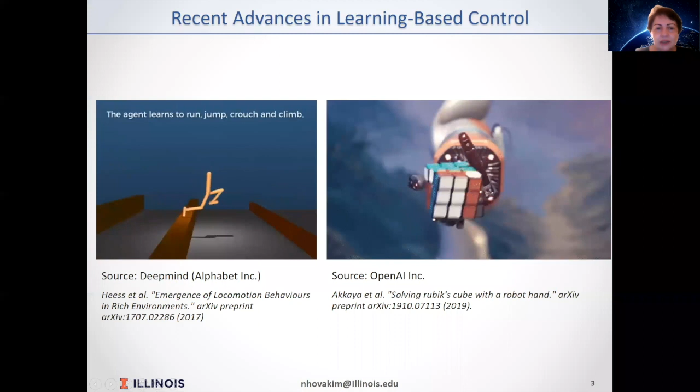To get started, I have here two animations that have got lots of attention on the media. Here you see an AI type of controller or learning-based controller, where, for example, on the left screen, the robot collects the data after every fall, uses the data to learn and goes forward. This video has accrued more than 10 million views on the internet.

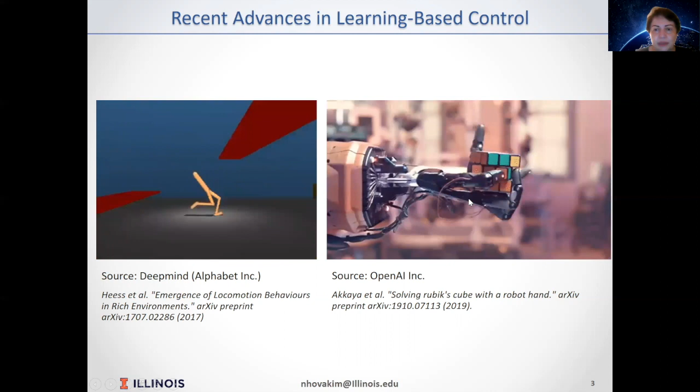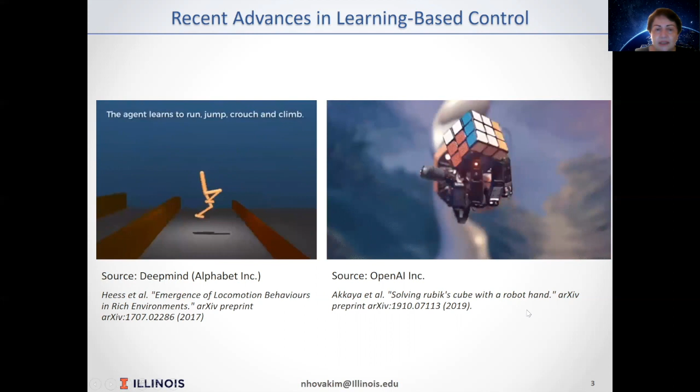And here is the Rubik's Cube that most likely many of you have played with. Again based on trial and error. It tries to assemble the Rubik's Cube, and there have been great success stories with it as well. Having these types of success stories, the learning-based control methods coming from computer science got lots of attention.

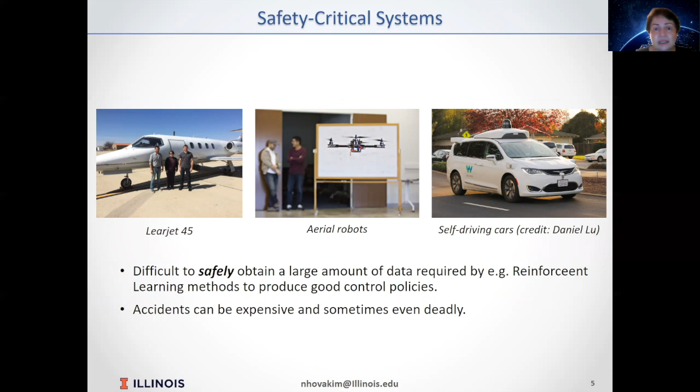However, as we work with safety critical systems, such type of approaches are not acceptable. One of the reasons is that when you are in an airplane or in a self-driving car, a crash can be catastrophic and cost you human lives. So what should we do so that we benefit from the availability of data, cheap sensors, cheap computation on today's platforms, and at the same time, never compromise the system safety?

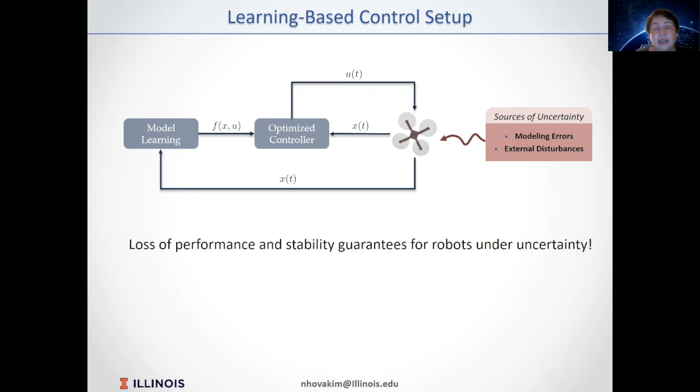In such systems, loss of performance and stability guarantees are quite possible when you have uncertainties that have not been accounted for in your modeling. You cannot train your model for all possible scenarios, right? Because accidents like loss of control efficiency or turbulence gusts can never be predicted well enough to have a trained controller for those environments.

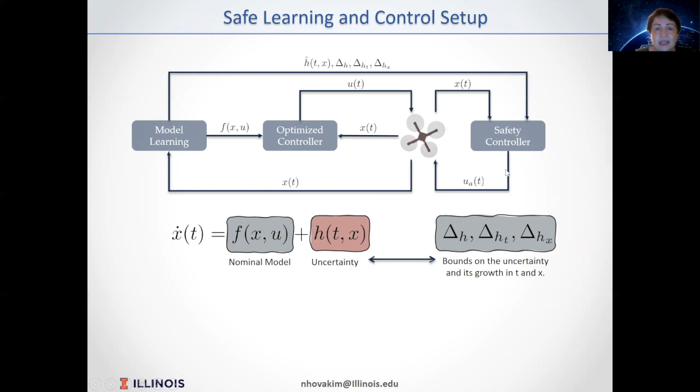So safety must be built into control architecture as a requirement. So what we do is add a safety controller that provides guaranteed safety regardless of the quality of the learning algorithm. And the safety controller will ensure robustness against all types of modeling uncertainties that may appear in your system.

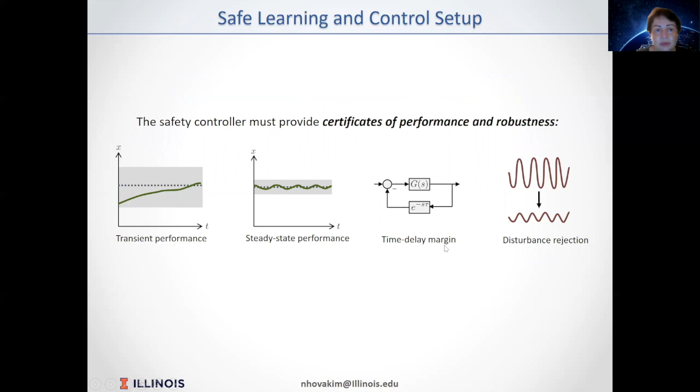The safety controller must provide certificates of performance and robustness that we know will come in the form of transient performance, steady state performance, time delay margin, and disturbance rejection. L1 adaptive control architecture, developed by our group over the last 15 years, ensures exactly these properties regardless of the uncertainties.

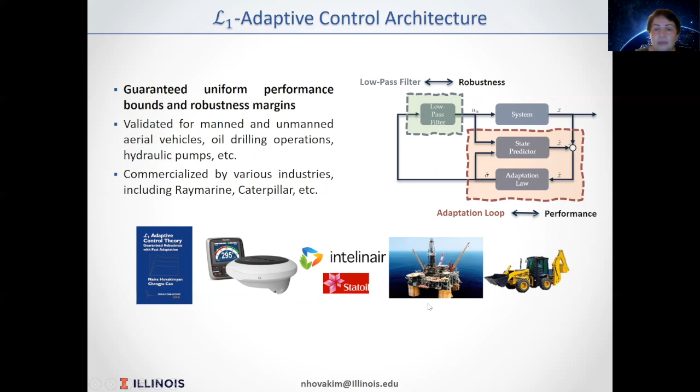This controller has been commercialized for a number of industries, a number of aerospace companies that need robust adaptive controllers. And let me skip the names of those. Outside aerospace industries, the Evolution Autopilot of Raymarine, drilling applications of Statoil, hydraulic pumps of Caterpillar, and many others.

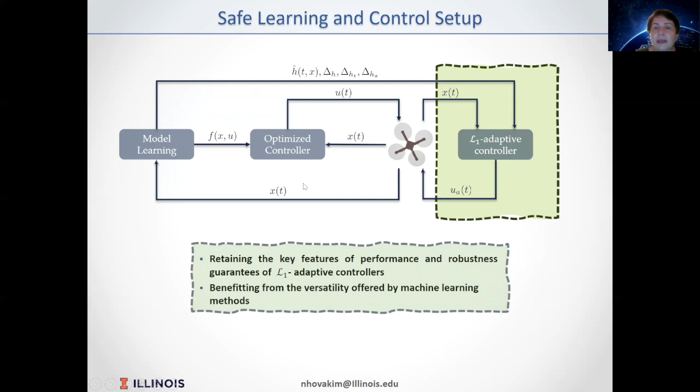So the typical safe learning and control setup that we are exercising and exploring in our group includes an L1 adaptive controller as a safety controller that ensures your safety regardless of the performance of the learning algorithm. And we have the ability to collect the data through the sensors, and using the computation power on the vehicle, we can figure out how to benefit from the data to have, for example, advanced path planning and more optimality in our performance.

The L1 adaptive controller that was developed by our group over the last 15 years had an intensive testing history. It was first tested on a subscale commercial jet at NASA, AirSTAR, within their aviation safety program using their AirSTAR testbed vehicle. Later it has been applied to a number of other vehicles over the past 15-20 years.

Our last flight tests include Learjet and F-16 platforms, where we have real pilots on the plane, and they are testing adversarial flight conditions.

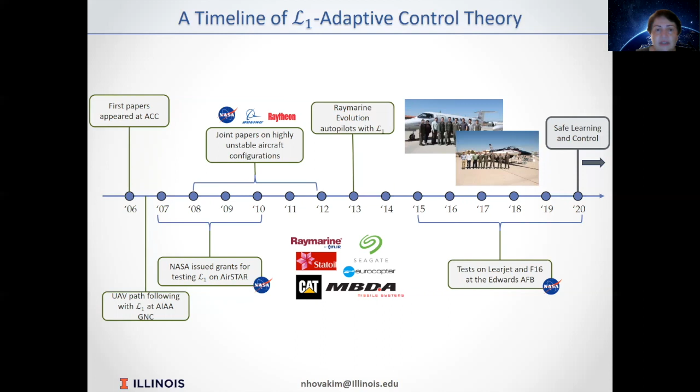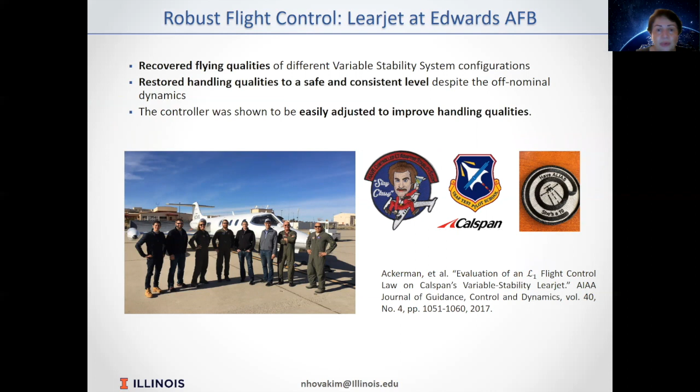So just to give you a glimpse of what we're doing, here is a flight test of the Learjet platform. I won't go through all the details, I'll just turn on the video so you see what's happening.

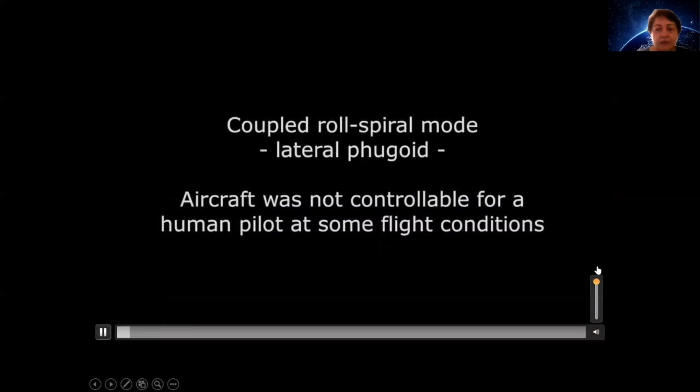Here is an accidental scenario that happened in 1967, where luckily the pilot remained alive, and the data of that airplane is available today to be loaded on the Learjet test vehicle, which we have access to at Edwards Air Force Base, thanks to one of my former students who is a test pilot instructor there.

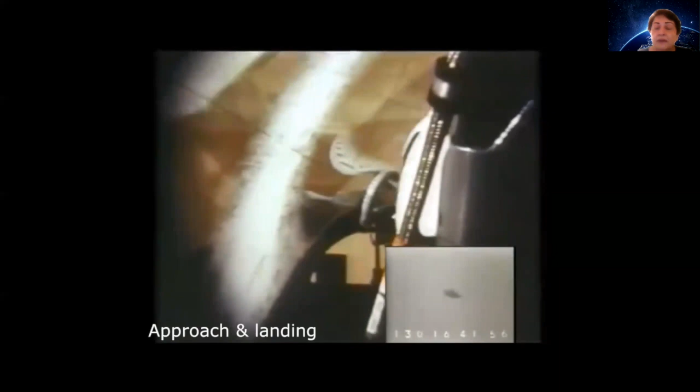As they load the data, we were able to test these different adversarial conditions to see how our controller would perform. In the current scenario, we have no learning. Let's go and see the first accident, for example, with the data loaded.

Without our controller, see what's happening. I can't even control the airplane.

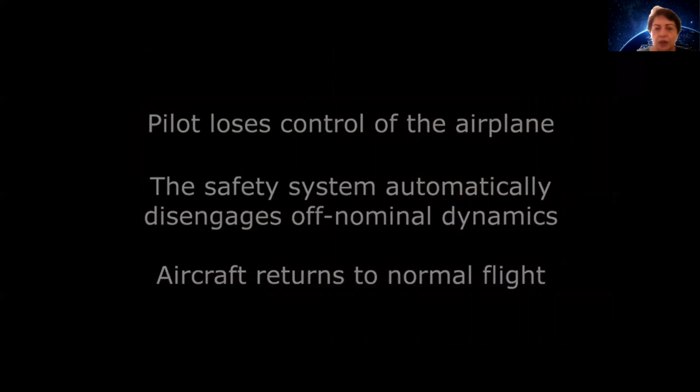You have the airplane? Now they repeat the same scenario with our controller on board, and we see how well we perform against the uncertainties. Okay, task in 3, 2, 1, now.

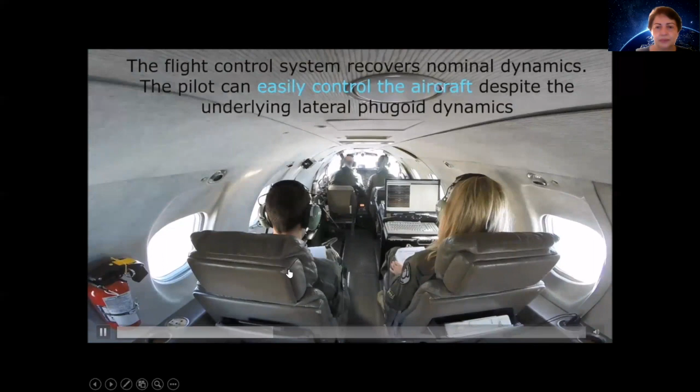So you can feel there in high frequency, I made some high frequency inputs, excited the roll. Lower frequency, the roll overshoot or oscillation tendency is less. Sounds good, there's still some there.

Pitch, I'm having no issues. Fine tracking and gross tracking are very good in pitch. All right, and I have maneuver complete. Now we have an engine loss scenario.

All right, recording on, in ready, hack. Running, okay, power's coming back. My hands are free. 3, 2, 1, now.

Controls fixed, and recover please. Okay, and recovering. Power's back.

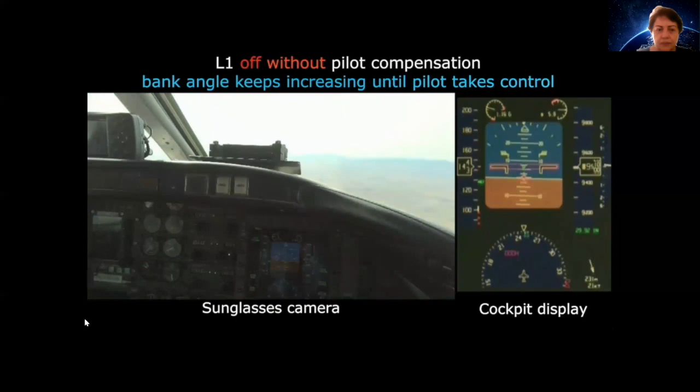And now without L1, with pilot compensation. I'm ready to try this now with a pilot correcting for it. So, okay, and I'll give it about 1 second of reaction time. I am on conditions, all right, and then recording on my call.

Ready, hack. On, okay, power, it'll be left throttle. Okay, in 3, 2, 1, now. 1 potato, and recovery.

And recording off. Okay, recording off, matching throttles.

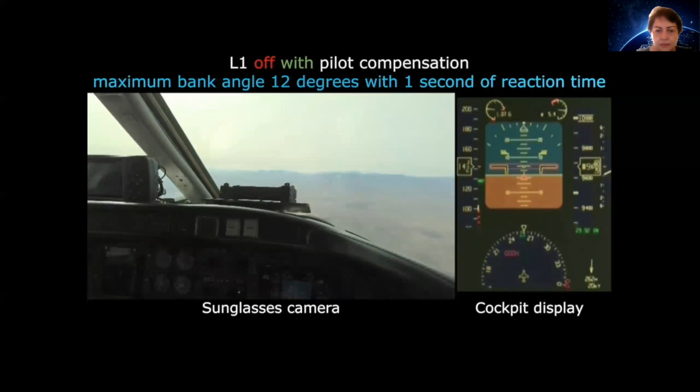Now with our controller, we'll see that the bank angle degradation comes down. I'm ready for the recording on, ready, hack. On, okay, left throttle coming back in 3, 2, 1, now.

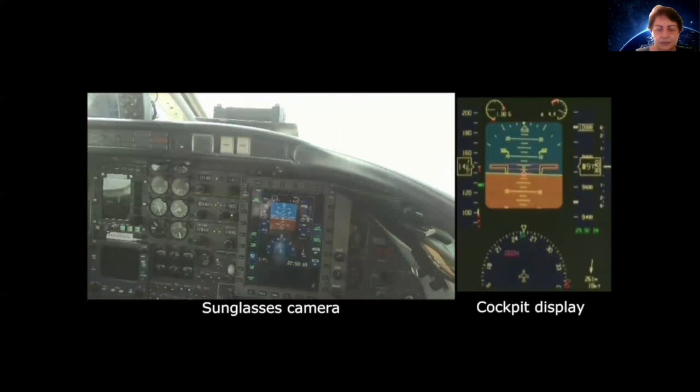I'm not touching the controls. Nice demonstration, yeah, check that out. About 3 degrees of left bank. Feeding in the rudder to match.

I can feel that, it is descending a little bit, but it's... yeah, descending a bit, but that would be easy to compensate for. Yeah, okay, I think you got some good data there. All right, recording off, matching power, recording's coming off.

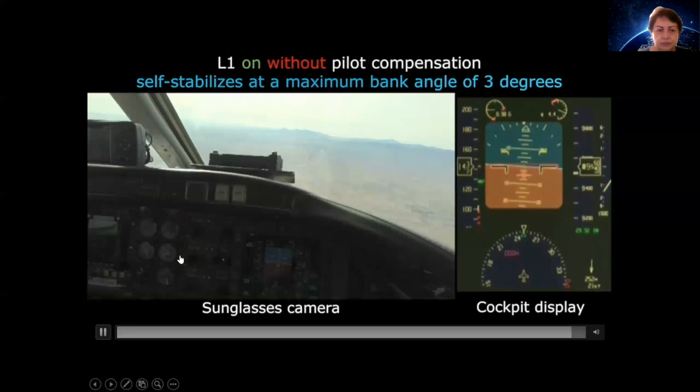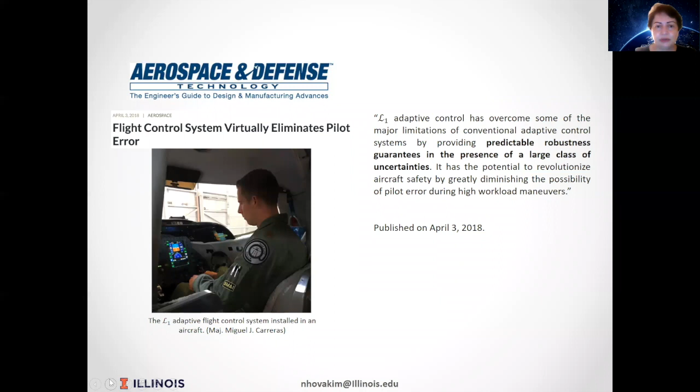So with this type of success stories, we look into the further challenges. We had some media obviously out of it, but considering all these other different applications, for example, this is a small robot that can help elderly at home.

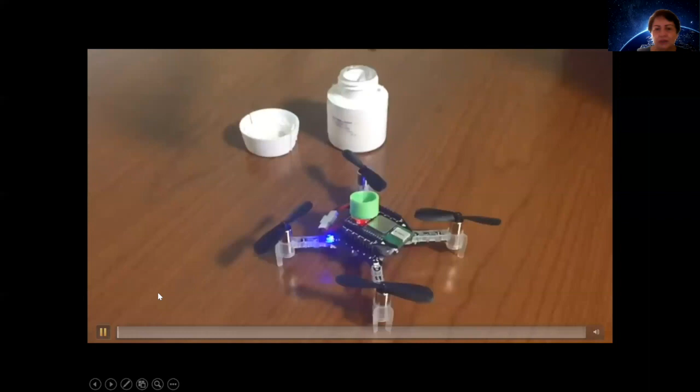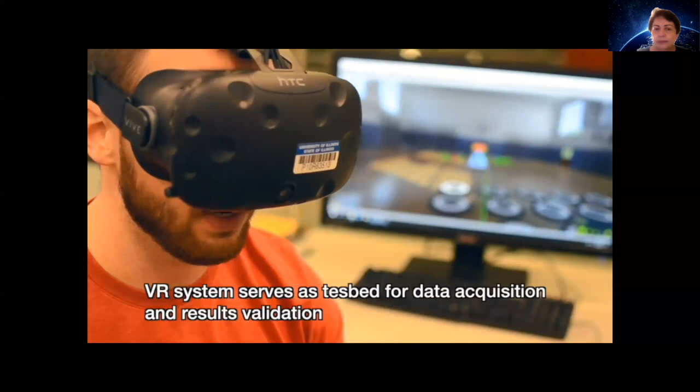Let me just run it a little bit. So, for example, deliver a pill for helping elderly, or pick up the fallen fork from the floor, or find the missing glasses, and many other type of in-house applications, like you see, it can bring a small object if the person is just unable to reach out.

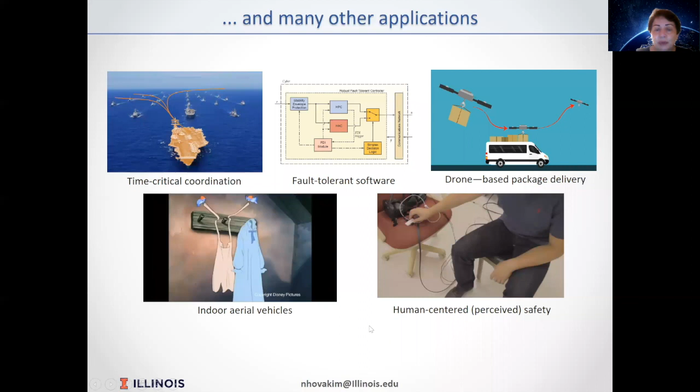So while working with these different applications, we encounter also other type of challenges. Last year, Lockheed Martin and MIT put together this simulation environment for a drone racing competition, where one of our collaborators from Georgia Tech was one of the 9 finalists.

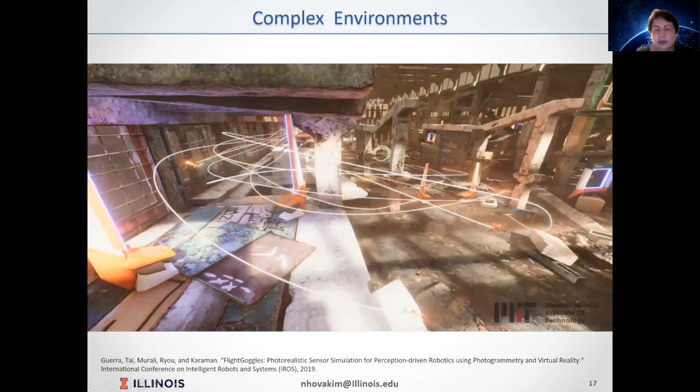And as they were testing their model predictive path integral controller, they were able, for example, to go through 4 gates. But to go through more gates, we were able to help them with L1 adaptive controller.

So these new challenges require us to be able to do fast replanning on the go, to have a safe plan, safe controller, and to be able to learn for high performance.

As I said, safety is guaranteed by L1 adaptive controller. We use learning to improve the performance. So let's see what we have done.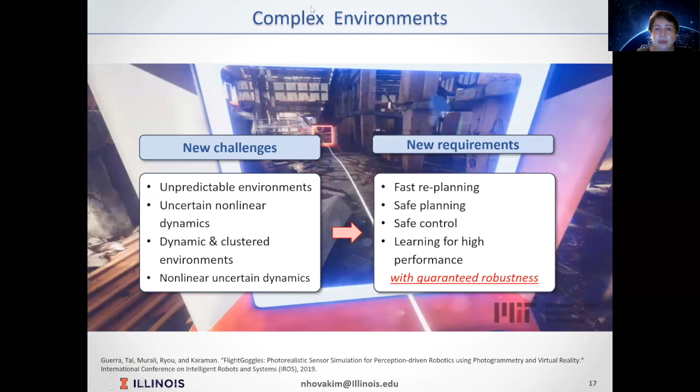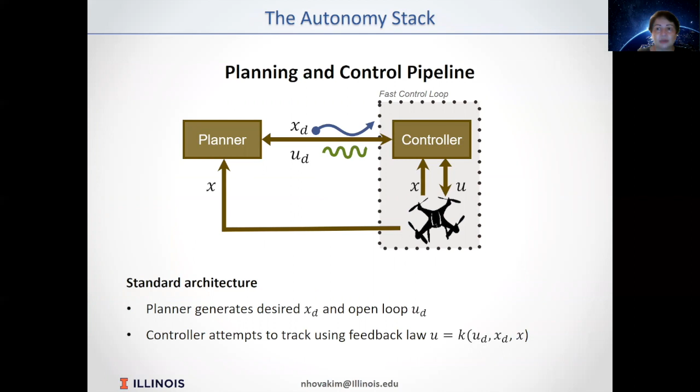So the typical autonomy stack consists of a planner and a controller. And the planner must conceive trajectories that the controller can execute. So there has to be a two-way communication between the planner and the controller.

The typical learning-based control pipeline involves the following steps. We collect the data, we do model learning, we produce control certificates, and with L1 adaptive controller, we have a robust controller around the loop.

So it's a bottom-up approach where the foundation is based on control theory, where safety comes as a requirement, and the build-up is based on machine learning, where performance comes as a luxury. The more computation we have, a better ML algorithm we have chosen, a better performance we can achieve.

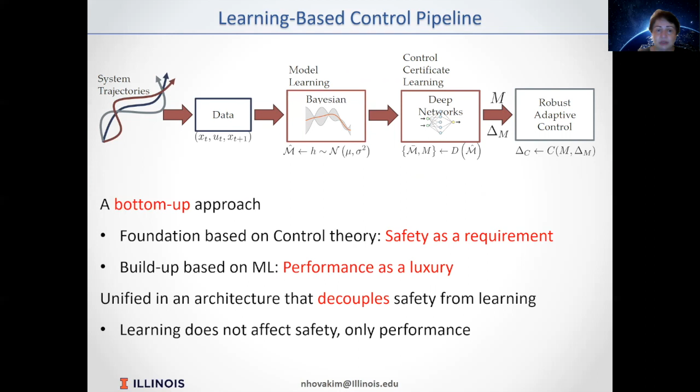So unified in an architecture that decouples safety from learning is what the focus of our research. Learning does not affect the safety, it only helps to improve the performance.

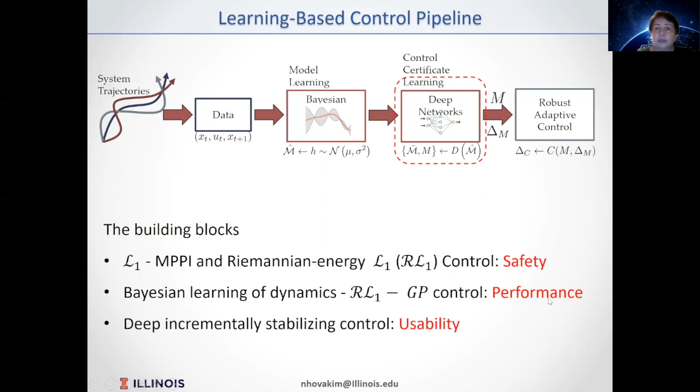So the building blocks we look at here will be L1 model predictive path integral controller and Riemannian energy-based L1 adaptive controller for safety, and Bayesian learning of the dynamics would help us to improve the performance. We will look for deep incrementally stabilizing controller to make sure we can extract control certificates.

So now let's go step by step through every block. So what do we do with L1 model predictive path integral controller? Having our L1 adaptive control architecture here, we augment our planner with a model predictive path integral controller that helps us to do faster planning on the fly.

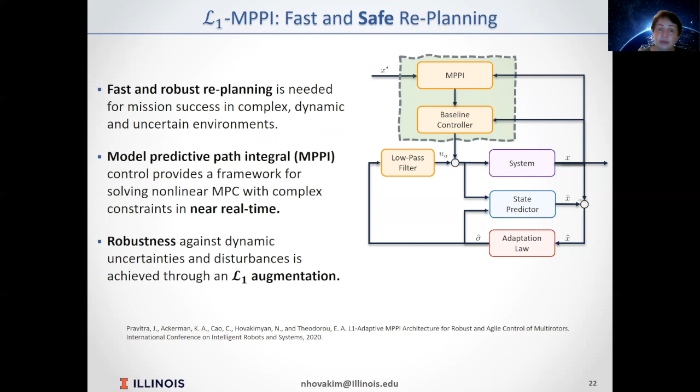That's the beauty of model predictive path integral controller. So as we deployed it in this architecture, let's see how we applied it.

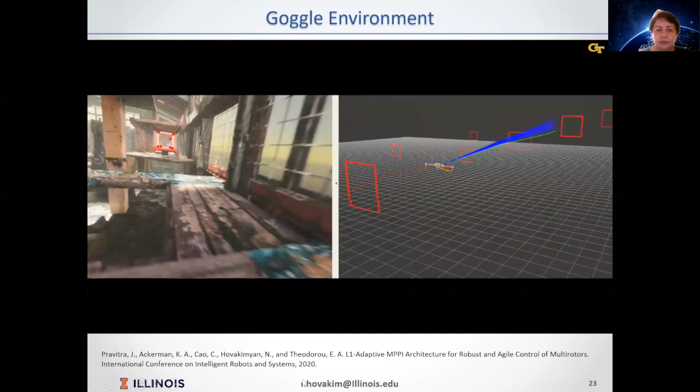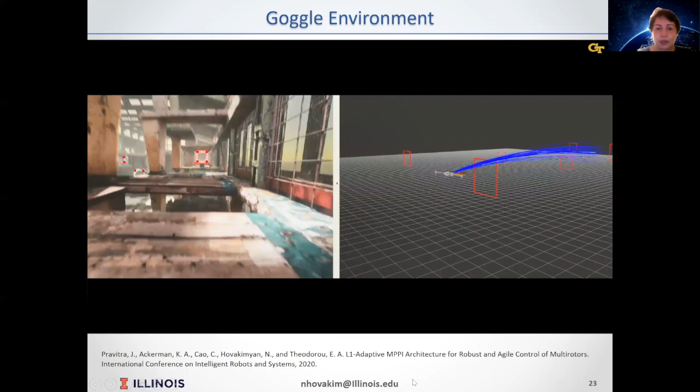So here is what they did without L1, and they go through 4 gates. As they go through 4 gates, they crash because they have to do very fast replanning in the presence of lots of modeling uncertainty. And as they augment it with L1, we'll see how they improve through their passage through more gates.

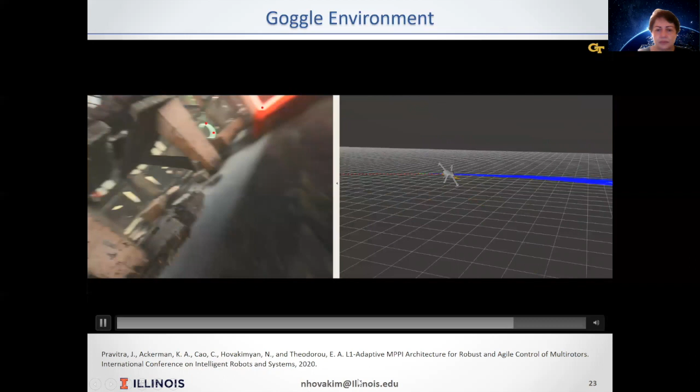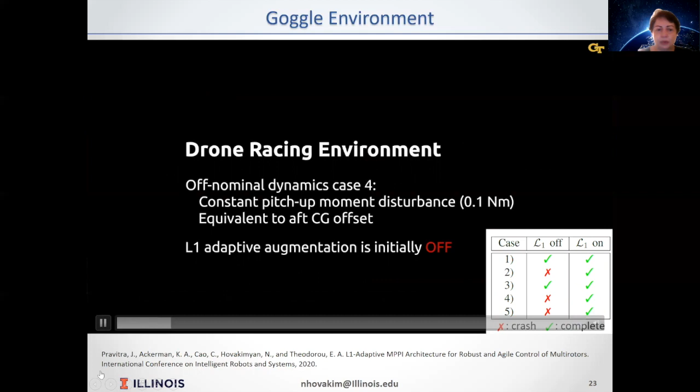Here it is. We see that without L1, they were failing, and L1 helped them to go through more gates. Basically, we add robustness, and with the help of learning, we can improve the performance.

Now, for example, if your robot wants to navigate in narrow spaces, you want to have a safety tube to ensure that your path planned through the entire time of operation will remain within the safety tube, not to collide with the obstacles. If you plan it a little bit conservatively, you may not be able to find a safe tube because you

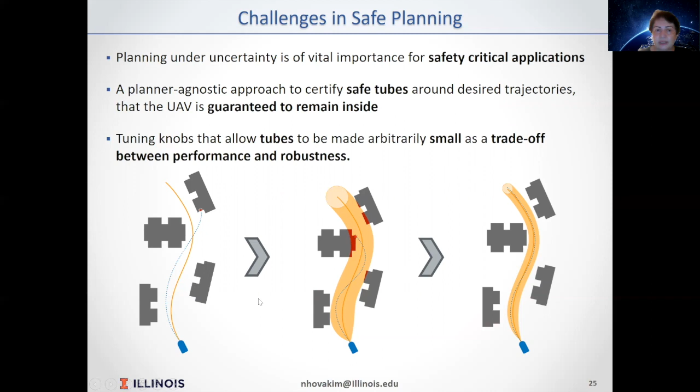may collide with these obstacles. So contraction-based L1 adaptive control architecture helps us to plan these tubes. And with the help of L1, we are able to reduce the radius of this tube to make sure we can go through very narrow passages.

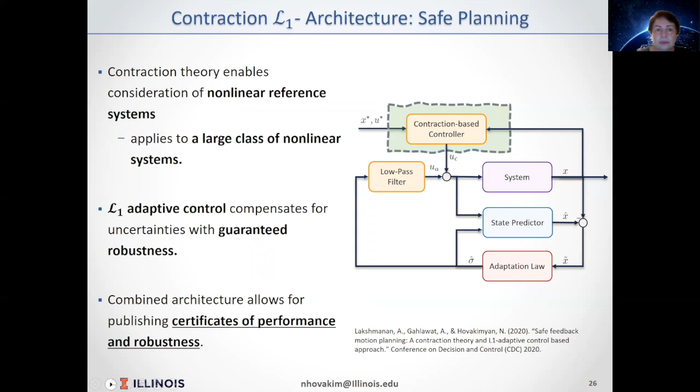So now we look at how to derive quantifiable safety certificates for nonlinear systems. So these are the tubes, as I said. With the help of L1 adaptive controller, we are able to tune the radius of these tubes dependent upon our knowledge of uncertainty.

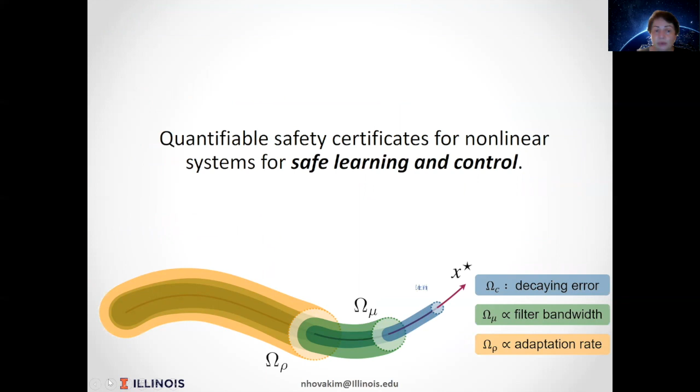And as we combine all these architectures, we have also a Bayesian learner that helps to learn the system uncertainties and quantify those in terms of high probability error bounds that we are able to integrate with the L1 adaptive controller for improved performance. So let's look now how we put all these systems together.

As we put all of them together, our combined architecture has a Bayesian learner for learning model uncertainties, a planner that uses the learned model. You see the feedback loop here.

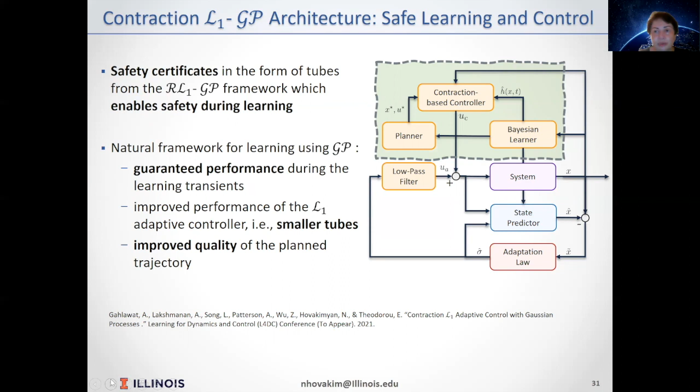The planner uses the learned model to derive control certificates using the contraction-based controller optimization approach. And we augment it with L1 adaptive controller to drive the system, so we are able to tune between the tubes. Here are some numerical examples.

As you try to navigate through a forest, at first you will choose a very thick tube. As you learn better, your tube will become narrow. But as you learn even better, you can choose a more narrow passage and be safe and confident that your safety will be guaranteed. The time of traversing the forest goes down from 27 seconds to 14 seconds, twice more

optimal. As we said, safety does not depend upon the learning, but learning can help to improve the performance. And this is what we show here.

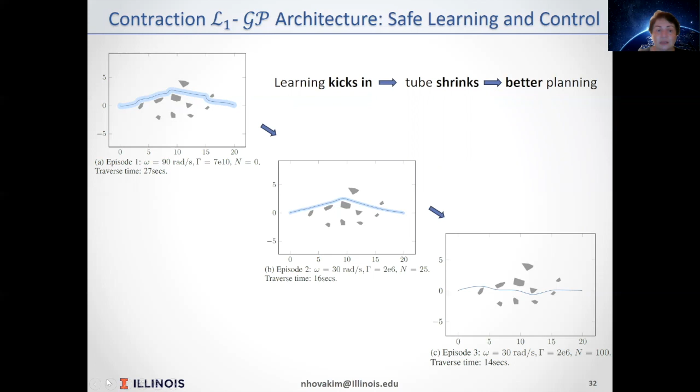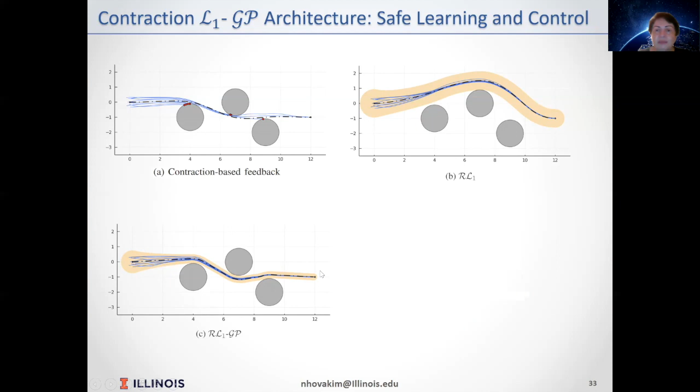Another example - these are all planner agnostic. It doesn't matter which planner we choose. For example, a drone that has to leave the square that you see here has 2 exits.

At first, it will go through this thick tube. Here are tons of trajectories generated, as you see. Then, as it learns better, it may try to go from here to here, kind of trying to find a shorter path instead of going the long way around.

But as it learns better, it will find the most narrow passage and feel safe to go through it. With all these learning model updates, no retuning is required for the L1 adaptive controller, and safety remains completely decoupled from learning.

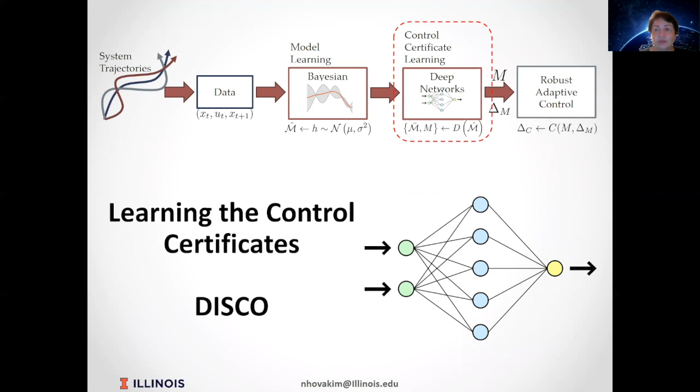So now as we learn the model, there may be a big question whether the learned model can help us to generate better control certificates in terms of the contraction controller that goes as a baseline controller to provide these tubes. So learning accurate models may not be enough.

The accuracy of the learned models is not sufficient to guarantee that the controllers can be synthesized. We need to extract from them controllable models. And here is where we use the deep incrementally stabilizing controller.

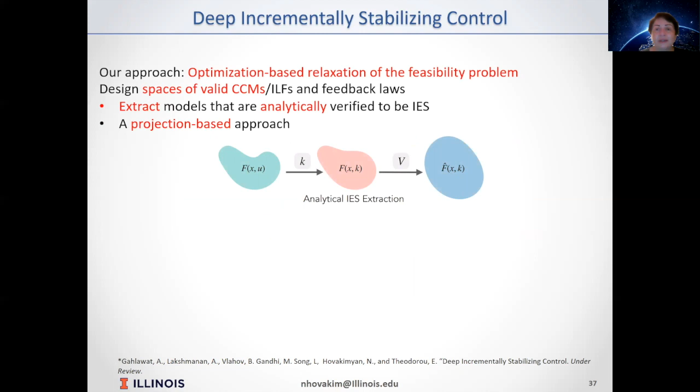So what it does, it helps us to extract models that are analytically verified to be incrementally exponentially stable. A projection-based approach is applied here that parameterizes the space of valid candidates using deep neural networks.

And because we are already looking into learned models, everything is known there. From these learned models, we're extracting a controllable model. We're talking here about highly nonlinear maps. Extracting this controllable model, for example, means minimizing the difference between the extracted model and the learned model.

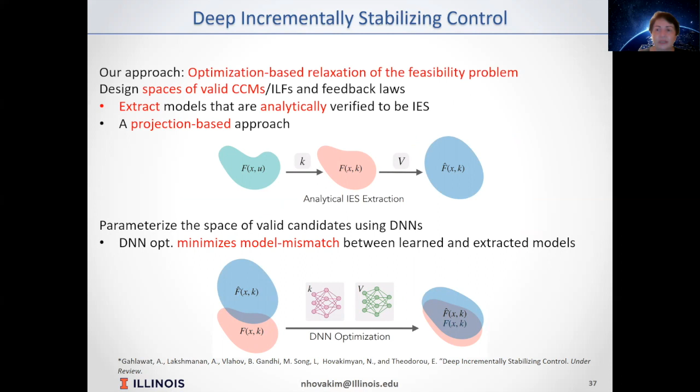Using this as your control certificate for the baseline controller would decide the size of the tube. So the control pipeline, again, if we revisit, would be data, model learning, control certificate learning, and L1 adaptive control augmentation.

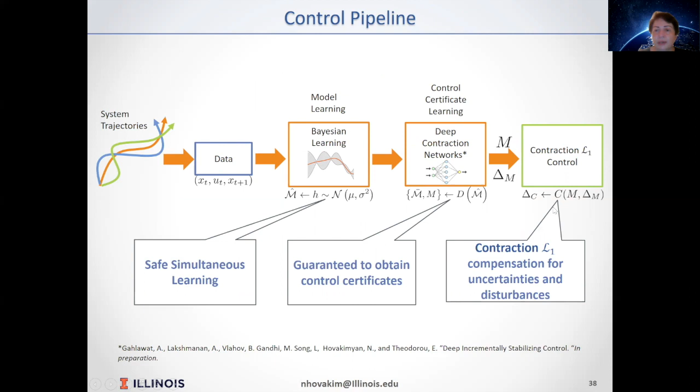In this example, just to remind you of the beginning example we showed, when we take these controllers to the real world, they may just not survive because they may be exposed to new data that was not used during their learning.

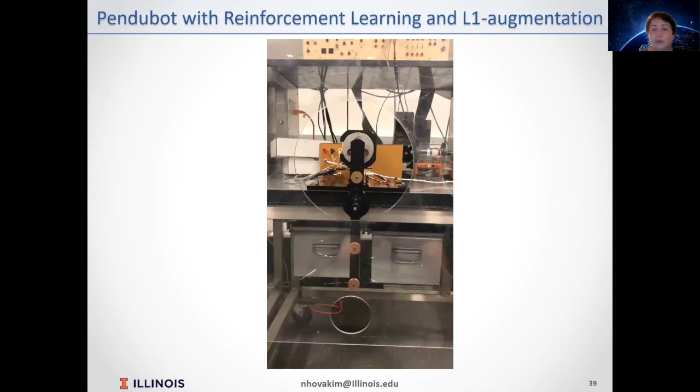Here we show how we augment, for example, an L1 adaptive controller around a Pendubot in a control lab, where the L1 adaptive augmentation stabilizes the pendulum that was trained using reinforcement learning in offline setting. You bring this reinforcement learning to scenarios where you have uncertainties for which it was not trained, which were not included in training. The reinforcement learning controller crashes, but if it has an L1 adaptive augmentation, it will survive.

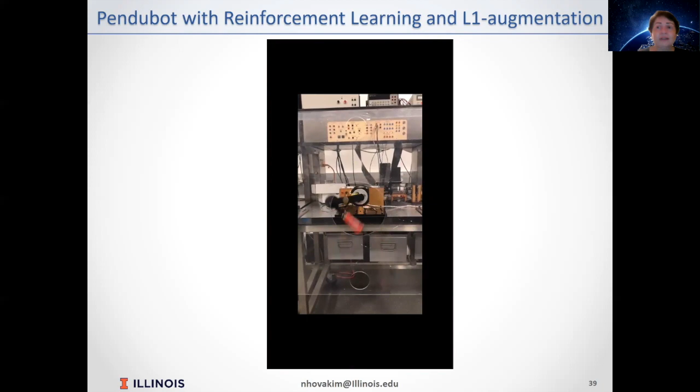And here we show a bunch of different uncertainties where the L1 adaptive controller is not being tuned. It's designed once and can handle a broad range of uncertainties without any tuning. So a reinforcement learning controller designed and trained in an offline environment can be brought to the real world in the presence of uncertainties, have L1 augmentation on top of it, and survive all these uncertainties without loss of stability.

Here we inject disturbances left, right, top, bottom. You will see it doesn't fail, so it doesn't fall.

And here are a few real-world problems from our lab where we have used some type of learning, not this particular pipeline. This was a flight test done in 2019 when NASA put forth the Learn to Fly concept to avoid wind tunnel testing for small consumable UAVs, which are supposed to be cheap and reduce costs for parcel delivery, agricultural monitoring, and other purposes.

Where you want really to work with customers that are not ready to pay expensively for a UAV to solve everyday problems. So we have to keep the cost down.

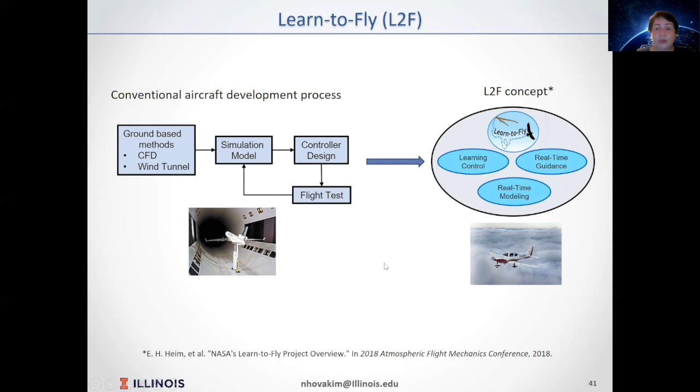The Learn to Fly concept assumes you take off the vehicle with a random controller, like a PhD student would, and then NASA's real-time system identification toolbox has the ability to learn the aerodynamic parameters in flight, on the go, and we update the model, and the model update helps us to update the L1 controller for performance.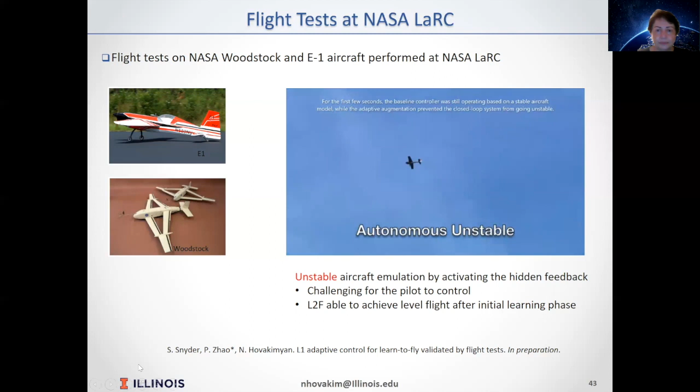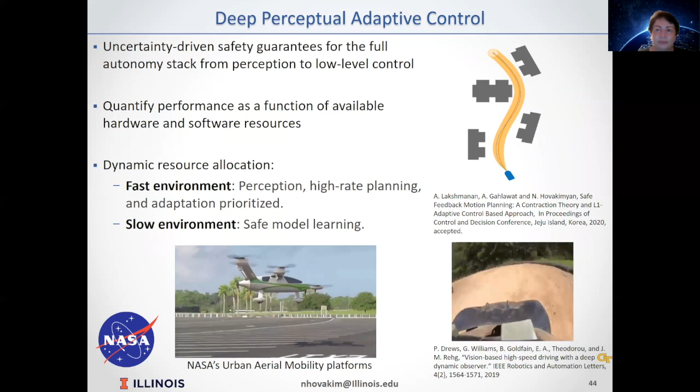And summarizing, so this is another project, again funded by NASA, to bring the L1 adaptive controller along with the perception-based controller from the Georgia Tech lab of Evangelos Theodorou to NASA's flying vehicles. If we bring the two together to NASA's flying vehicles, that would be a good demonstration of how we integrate methods from L1 adaptive control's track record in literature with perception-based control that Georgia Tech has done for self-driving cars, deployed on NASA's flying vehicle.

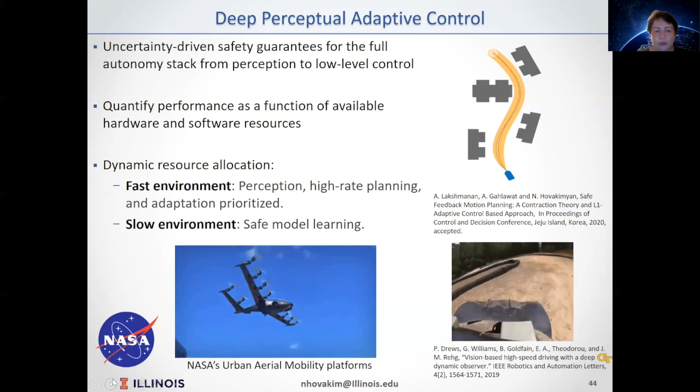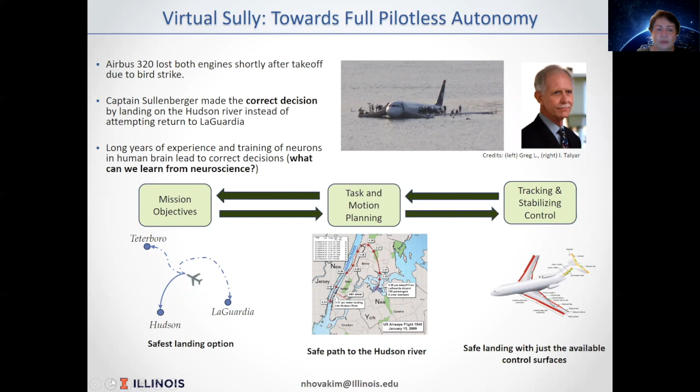We would like to see how to conceive such an autopilot that could take advantage of knowledge acquired in neuroscience, for example, and based on real-time data monitoring, determine control failures, new safe mission reconfiguration, path planning, and safe landing site selection. Doing this three-way adaptation would be ideal if we can mimic such flight test scenarios or use data from them to demonstrate the validity of these conjectures.

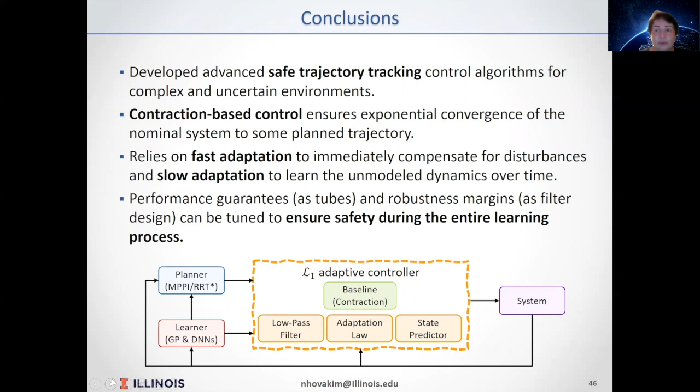So in conclusion, we have the L1 adaptive controller that we are able to augment with different planners and different learning algorithms to generate the next generation of autopilots that can safely operate flying technologies or other autonomous technologies, self-driving cars, or other applications, where safety would be guaranteed through L1 adaptive control, and learning will improve the performance and optimality.